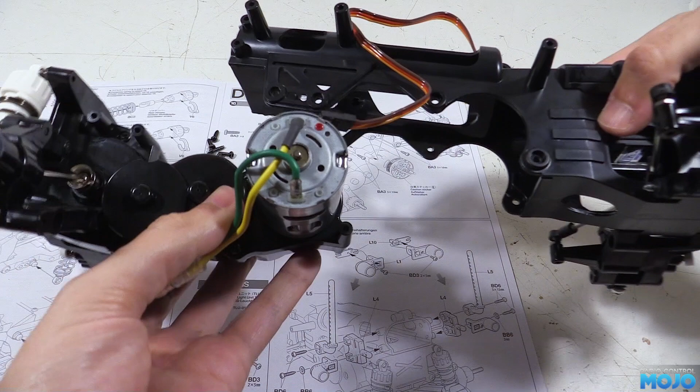With all the bits poured out into tubs and tidied away, we can get started with step 16, mating the chassis with the gearbox. For parts, all we need is 8 3x10 self-tappers and the two big bits of buggy that we've put together so far. Being Tamiya, the fit of the two parts is excellent, so it's really easy to offer up the gearbox to the chassis and get all the holes to line up.

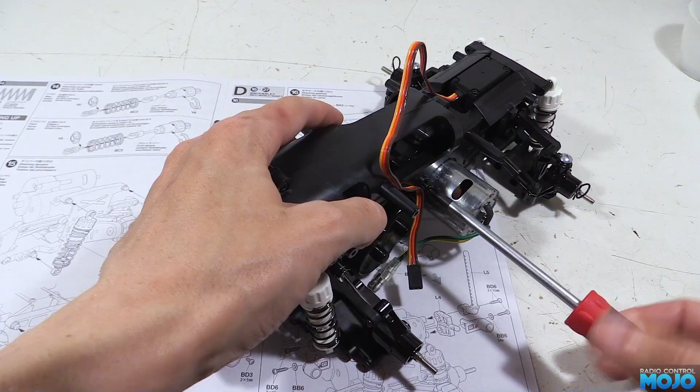There's 4 screws on each side, screw them in so they're still a little bit loose, then go round and nip them up. When done, you should have a rather nice, stiff chassis.

Step 17, battery and body mounts, and the rear light pods. This time we need 2 M2x5s, 4 3x15 self-tappers and 2 3mm washers. For plastic, top to bottom, we have 2 L10s, the LED retainers, 2 L1s, the LED mounts, 2 L5 rear body posts, and, when I notice they're missing, 2 L4 battery cover mounts.

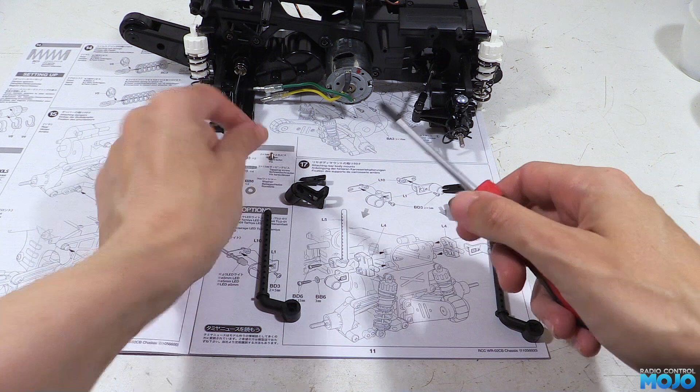First, to get the small screws out of the way, we're going to mount the LED retainers to the mounts. I found it easiest to pop the screw into its hole in the mount, then offer up the retainer and thread in the screw. Remember, it's a tiny machine screw going into plastic, so watch out how tight you do it up. It's not going to take much to strip out the plastic.

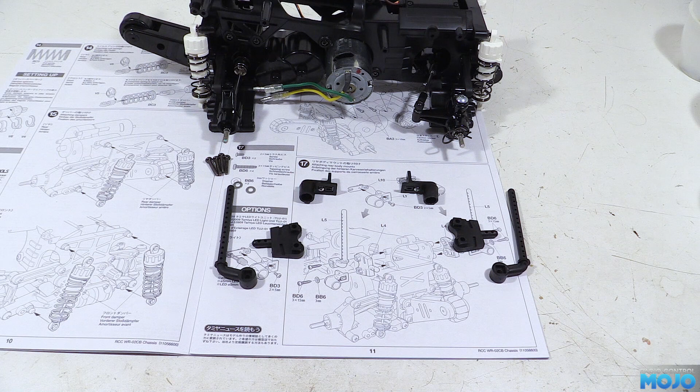Next, now we've got the battery cover mounts out, we can fit them to the sides of the chassis. The side of the mount with the round holes goes over the short post right at the back of the chassis. Then we offer up the body post to the top square post on the mount so it's facing backwards and install one of the screws.

Then in the bottom hole we fit the LED mount, again using one of the self-tappers, but this time with a washer under its head. Before you tighten the screw up all the way, you'll want to position the mount so it's facing backwards, nice and level. Same again on the other side, and that's the rear mounts fitted.

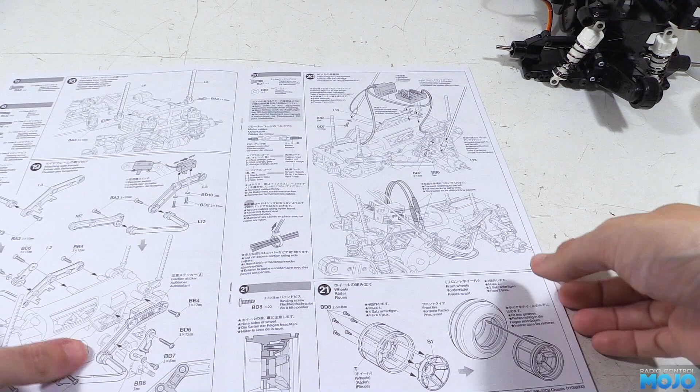Step 18, the front body posts. Now this one's super quick. All we need are 2 3x10 self-tappers and 2 L6 body posts. The posts offer up to the square nubs near the front of the chassis, it doesn't matter which way round they go, and install a screw. Nip it up, repeat on the other side, and that's it, the front body posts are fitted.

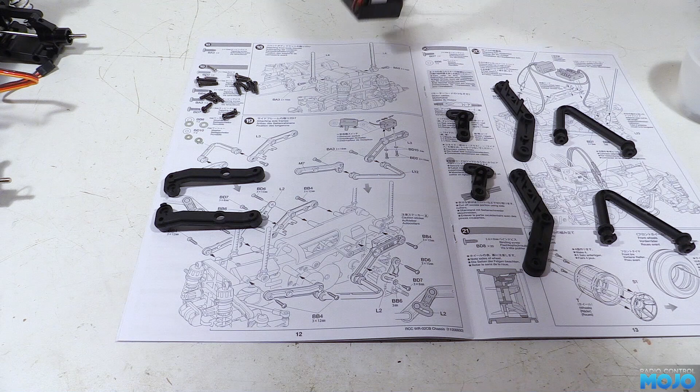Step 19, the side frames. For this one we need 2 M2x10s, 2 3x15 self-tappers, 6 3x12 self-tappers, 4 3x10 self-tappers, 2 3x8 self-tappers, 2 3mm washers and 2 2mm washers. For plastic we have an M6 and M7, the front parts of the frame, which are sided, so keep track of which is which. Then on the right of the manual we have 2 L12s, the antenna mounts, 2 L3s, the rear parts of the frame, and 2 L2s, the nudge bars that go in the middle. We'll also need the ESC as they want us to fit the power switch in this step too.

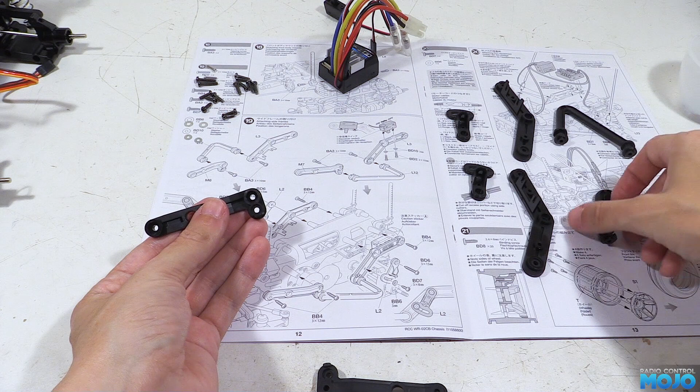First we'll build up the two frames. For the right side we start with the M6 front part and offer up the front of an L2 nudge bar. The bar has keyed ends, so there's no problem getting everything nice and straight. We just need to screw in a 3x10 and nip it up.

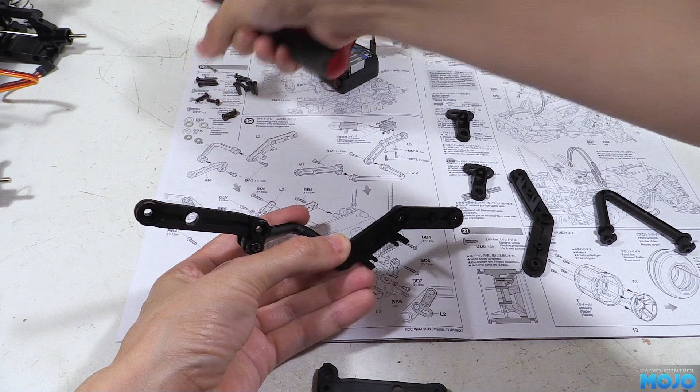For the L3 part, it's largely the same. Just offer it up and thread in another 3x10. There is a bit of a gotcha though. L3 will happily fit two ways, so check carefully with the diagram to make sure you get it the right way. The other frame is the same, except we use the M7 at the front.

Again, you need to make sure that you get L3 the right way round, which of course I didn't. I think it was well past midnight at this point, so mistakes were starting to creep in. Still, it's only one screw at this stage, but if you've already mounted it to the chassis before you notice, it's still quite doable, but it is a bit of a faff.

On this side we also need to fit the power switch. Now because we're using a Tamiya ESC, the switch is a direct fit. If you upgrade, you might find you need to stick the switch down somewhere with some servo tape. We'll need to remove the two black screws from the switch so we can replace them with the slightly longer silver ones and washers from the kit. We want to thread them in so there's a couple of millimeters gap between the washer and the switch housing.

Then we offer the switch up to the slots in the frame and tighten up the screws. You'll want to position it so the on side is towards the front of the frame so it matches the manual. It'll work either way round, but it's good to do it right. Next we'll attach the frame to the chassis.

There's a few different length screws, so double check as you go. The rearmost is a 3x12, as are the front two. For now we'll just do them up so they're still a little bit loose. The interesting one is the third hole.

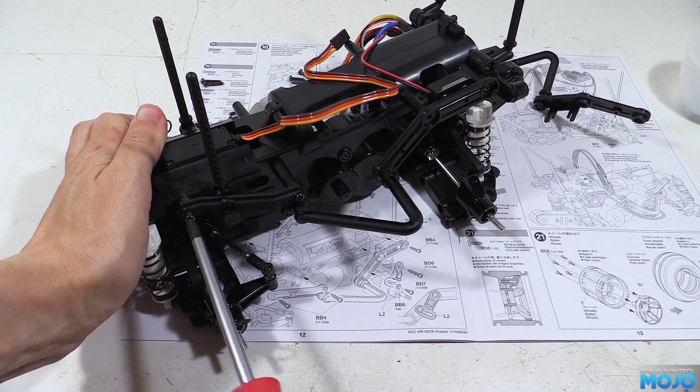This is where an L2 mounts for the antenna mount. The hole lines up with the hole in the frame and we use a 3x15 to attach it. The idea is we can set the angle of the antenna tube. Initially we'll leave it slightly loose while we fit a 3x8 self-tapper with a washer under its head in the slot and thread it into the frame.

We want to hold the mount so it's as vertical as it will go and then nip up the screws. Go around and nip up the other four too, and that's this side complete. Repeat with the other side, but without the switch of course, and that's step 19 complete.

Step 20, electronics mounting and antenna tubes. For screws we need two 3x8 self-tappers and two 3mm washers. For plastic all we need are two L13s, the antenna tube mounts.

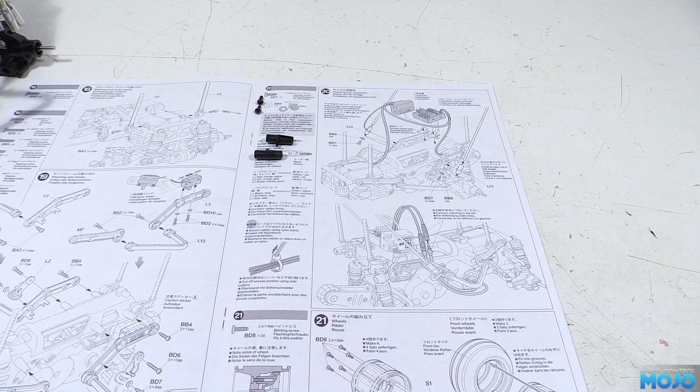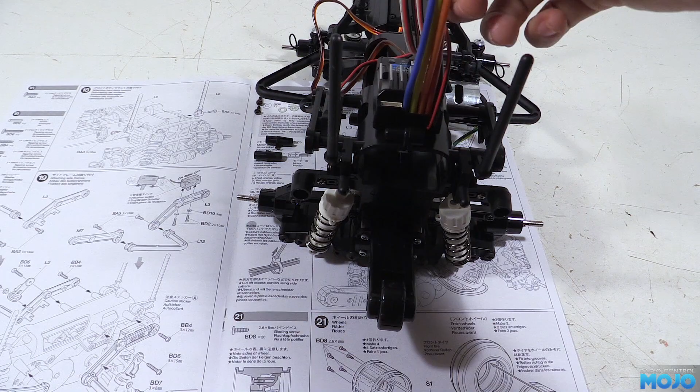Now before we begin we're going to diverge from the manual a bit. Tamiya want us to stick down the ESC and receiver in this step, but I much prefer getting the body and other bits fitted first so we can see how and where everything's going to actually fit. We've got our Wild Willy style driver to fit on the top of the chassis, so it makes sense to have all that in place before we start sticking bits down.

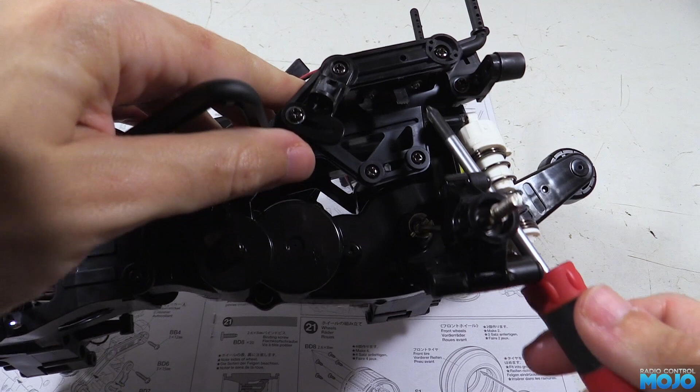Plus, if we loosen the two switch screws, we can take the ESC away, making life much easier without all those wires getting in the way. With that lot gone, we can fit the antenna tube mounts. They sit on the platform with the flat towards the inside to stop them spinning. Then we just need to thread in a 3x8 with a washer to attach them.

Do both sides, and when the time comes we're going to slot in some antenna tube to make the flagpoles. For now they're just going to get in the way, so we'll come back to them later.

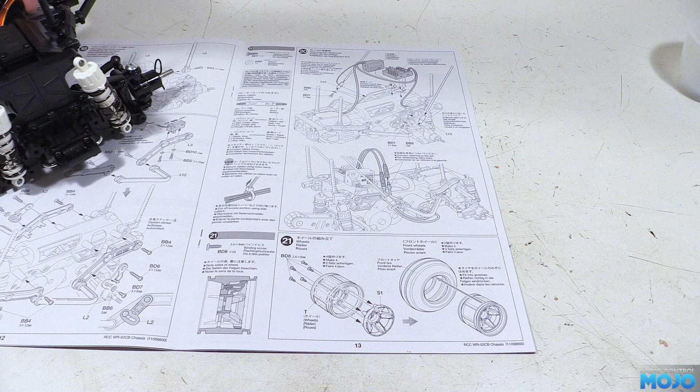Step 21, the wheels and front tyres. We need 20 2.6x8 self-tappers, 4 wheels and 4 of the coloured inserts. Now this is a really simple step, there's absolutely nothing that can go wrong, unless it's after 1 AM and you should have gone to bed.

All we need to do then is offer up one of the coloured inserts, then from the inside screw in 5 screws. Simple. Except the wheels aren't symmetrical, they have a small offset. If you look at the cross-section diagram it's really obvious. But I didn't. Still, the wheels went together perfectly in all other respects.

It's not really a big deal though. When I finally do notice, it's just a case of removing the screws and swapping the insert to the other side. Anyway, assuming you have yours the right way round, we can install the front tyres.

They simply stretch over the wheel with the tyre fitting into the slots. It should be really simple, and for the most part it is. However, the tyres have a bit of a step on the side and I found they tend to sit a little bit off centre. You can see the crown of the tyre is a little bit offset. That's because the bead isn't sitting nicely. From the outside it's not at all obvious.

If you use something like a small screwdriver, you can use it like a tyre lever to get the tyre settled into place. Just be gentle with it, there aren't any foams to damage, but if you're a bit heavy you could always cause some damage to the tyre. When it's right, you'll find it sits nice and even on the wheel.

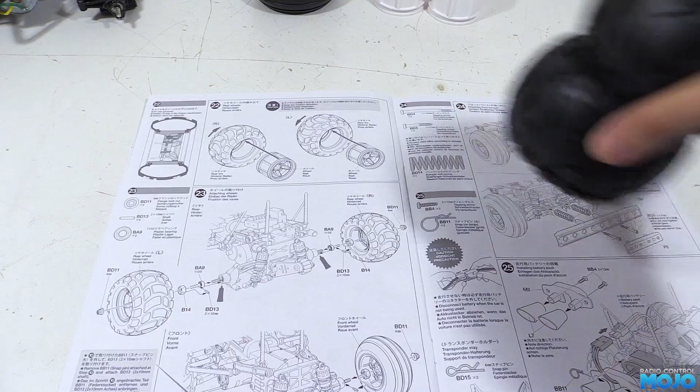Step 22, the rear tyres. Now this one's pretty much the same as the front, except the tyres are directional. As long as you make one for the left and one for the right though, you're good to go. Pull the tyres over the wheels and job done.

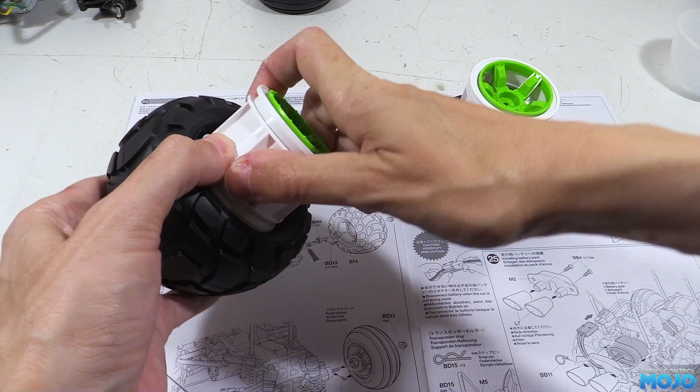Now it's worth mentioning, some of you might be wondering where the tyre glue is. Tamiya don't mention glue, which I suppose as a beginner kit does make sense.

You can really get yourself into a mess if you're not careful. Skipping ahead a bit, after a few runs on grass and rough gravel, the tyres are still nicely seated on the wheels. I think if you fit a much faster motor you might find they come adrift, but with the stock silver can they work just fine without any glue.

Step 23, fitting the wheels. We'll need 4 M4 flange wheel nuts, 4 2x10mm pins, 2 1150 bearings, 4 B14 wheel hexes, the chassis and of course the wheels. Starting at the rear we need to press in a bearing, slide in a pin and offer up a hex. Next, a rear wheel goes on, and then we thread on one of the nuts.

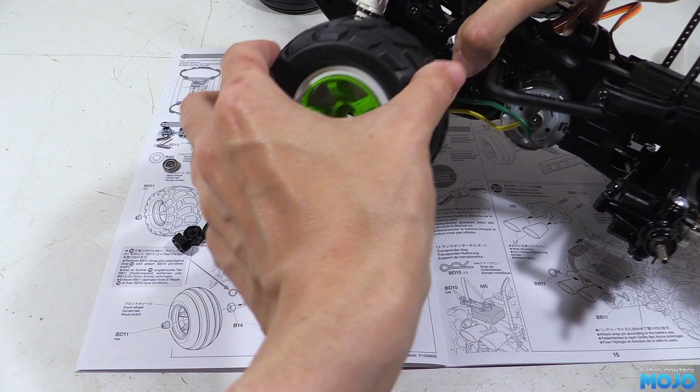Now this is where I noticed that something was a bit wrong with the wheel. It was binding on the suspension arms and locking up completely. With a bit of thinking, which was pretty difficult at that time of night, I realised what the problem was, and I swapped the insert to the other side. You can see this time the wheel fits much better, and the insert is actually an insert, not sticking out.

The problem now is I've managed to fit the wrong rear wheel. The tread is facing the wrong way. So after swapping the wheels and doing up the nuts, again we have one wheel fitted. The moral of the story is, don't build when you're dopey. It adds so much extra work. The other rear wheel goes on the same way, so we can just cut to that fitted.

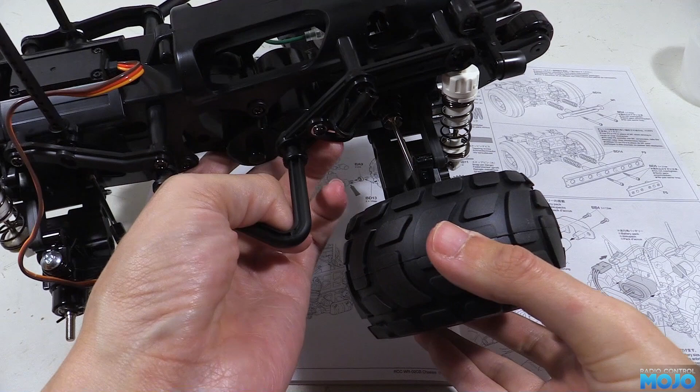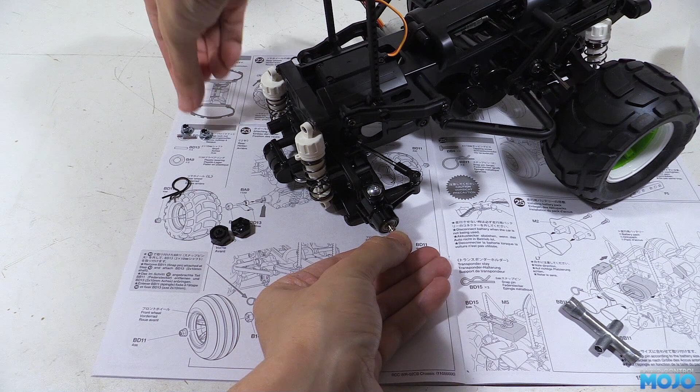Nice. The front wheels are a little bit different. They already have the bearings in, and they have body clips in the pinhole so the axle doesn't drop out from the inside. We need to pull the pin while keeping a hold of the axle and fit the pin and slide on a hex. Once the hex is on, it's not going to fall apart, so we can offer up a wheel and thread on a nut. Repeat on the other side, and we have a rolling chassis, complete with some soft but ever so smooth suspension.

Far better than you'd expect on a basic Tamiya kit. Far better than those old friction shocks. Now, I was planning a damper upgrade, but as long as these ones don't leak, I think they're going to do just fine as they are.

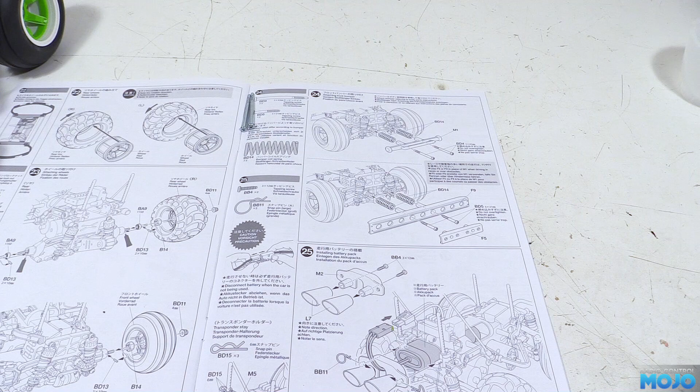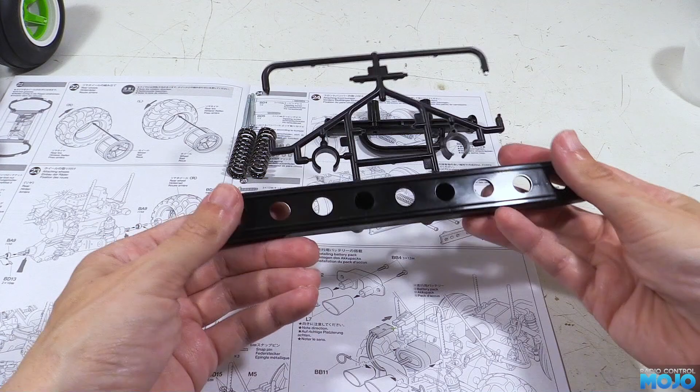Step 24, the front bumper. Now there's a couple of choices of bumpers here. I'm going to go with the Grasshopper bumper, so we need two long 3x43 self-tappers, 2 springs and the M1 bumper. If you're a beginner, you might want to go with the F9 wide bumper and the shorter screws. The wide bumper covers the front wheels for far better protection if you clip a curb or other unmovable object. Fitting any of the bumpers is largely the same though.

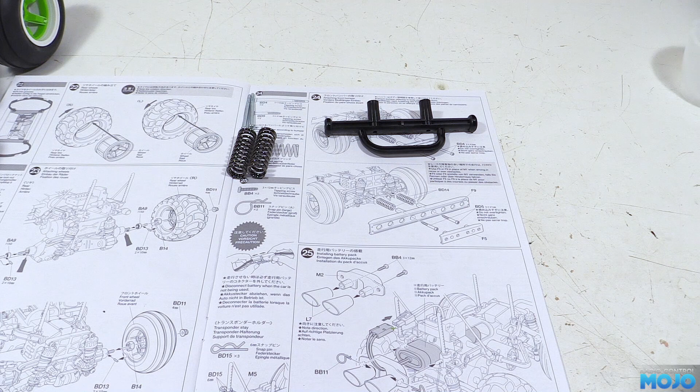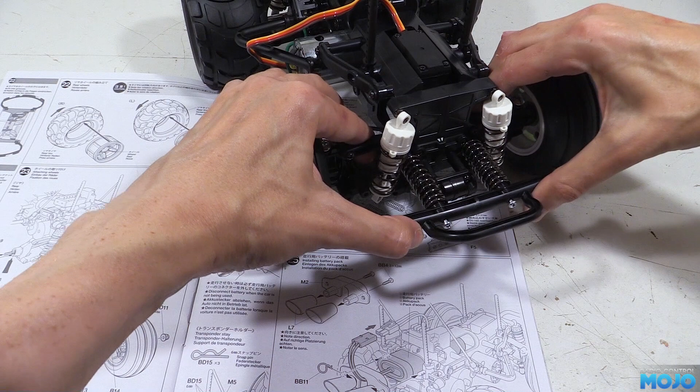We just slide the springs onto the bumper posts and offer it up to the posts on the front of the chassis. Then insert a screw from the front and thread it in. Same goes on the other side, then tighten them up. Keep going until you feel them hit the end of the threads. It's going to feel extremely stiff, but surprisingly, if you have a head-on crash, it's still going to absorb quite a lot of the impact.

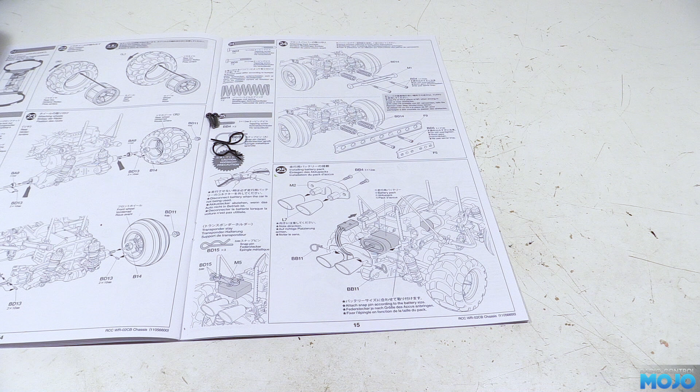Step 25, the battery cover. We're going to need two 3x12 self-tappers, 2 large body clips. The ones that we took off the front axles will do just fine. The battery cover M2 and 2 L7 exhaust tips. The tips offer up to the cover and are fitted with the screws.

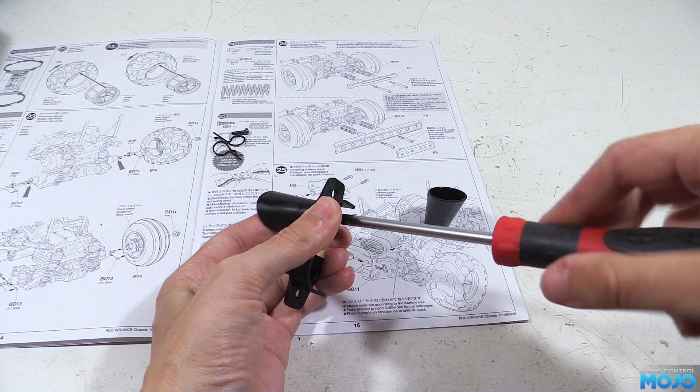The parts are keyed, so if you spin them round they'll drop into position so you can tighten up the screws. The tips do have some silver decals on the decal sheet which you can fit, but I think if you want to make them silver you'd probably be better off using paint. Of course, you can just leave them black.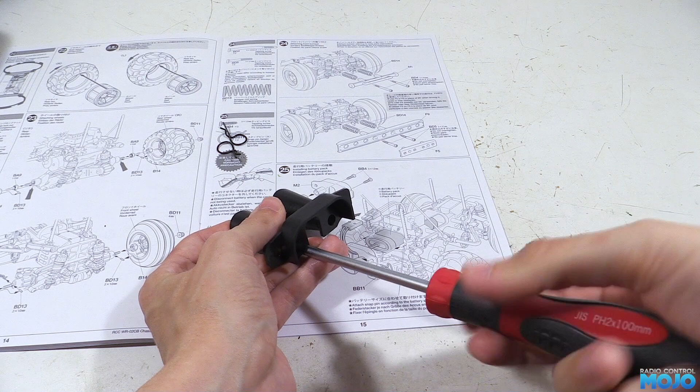When the tips are on, we can grab the chassis and slide in a 6-cell NiMH. Offer the cover up to the posts, clip in the clips, and if we'd fitted the ESC and radio, we'd be ready to power it all up. But that's going to come later. For now, we're going to remove the battery until we're actually ready to use it.

And well, that's going to be about it for this week, I think. Technically, we're not quite at the end of bag D, but the rest is more bodywork rather than chassis, so I think it's a good time to stop. Next time we'll put together the driver, get the scissors out, and probably play with some masking tape and paint.